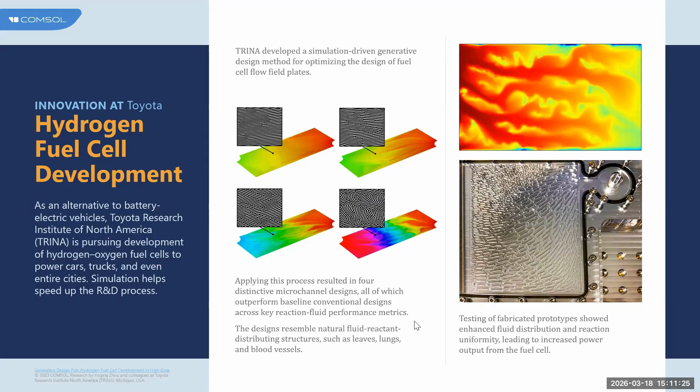And let's start with the hydrogen production itself. Let's go into various technologies, especially used in hydrogen production.

Generally, methane reformers work on a principle where you have steam coming in along with methane, and there you might be requiring to solve CFD analysis, and along with that, you might be looking into chemical kinetics, reaction mechanisms, and so on. Coupling between those are required here.

And when we move on to alkaline electrolyzers, you will be looking into current distributions across your fuel cell or electrolyzer stack. And later on, you might be looking into something like multiphase flow, especially when it comes to the flow channels in PEM electrolyzers, and also in solid oxide electrolyzers.

There will be transport of various ions into the solid domain that you might be looking into, and all of these involve multiphysics nature, or multiphysics couplings are required to solve these. And having a complete look into these multiphysics simulation results would give you more efficient or more cost-effective designs.

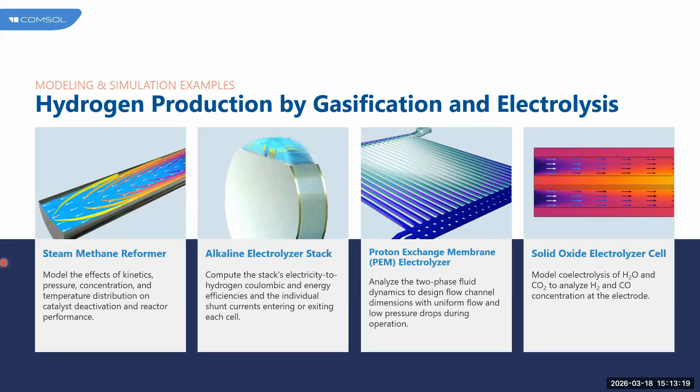Similar to this, when you go to the consumption part as well, there is multiphysics requirement, or multiphysics plays a key role. After producing hydrogen, the next step is the consumption of hydrogen, especially with fuel cells. These fuel cells generate electricity through electrochemical reactions, generally between hydrogen and oxygen. Unlike traditional combustion engines, fuel cells produce more environment-friendly electricity, where the byproduct is only water. To understand how effective that is, we look into CFD simulations plus electrochemistry plus chemical reaction engineering, quite similar to what we had in hydrogen production as well.

Talking more about these fuel cells, you have well-known technologies such as PEM fuel cells, which are widely used in transportation, either in electrical vehicles, buses, and also in some cases as backup power systems. These PEM fuel cells mainly operate at low temperatures and generally start quickly. But the challenges that you face should also be looked into, for example water management or membrane degradation that occurs in these fuel cells. These concepts should be addressed while developing fuel cells or hydrogen production technologies.

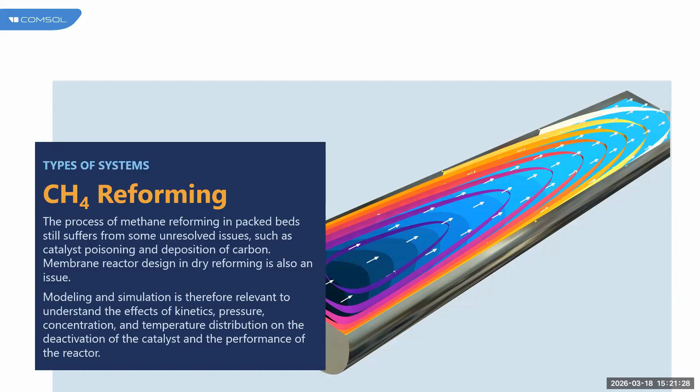To understand the setup, starting with the model definition, in order to simulate methane reforming, we first define the reactions and the reactor configuration. Coming to the reactions, we have both the steam methane reforming reaction along with the water gas shift reaction.

These reactions occur inside a multi-tube plug flow reactor. The geometry you can see on the right hand side of your screen is one such example, wherein you have multi-tube reactors, and in each of these, reactions occur, and these tubes are packed with porous catalytic material that generally speeds up the reaction process.

Because the reforming reaction is highly endothermic in nature, meaning it absorbs heat, we generally place furnaces, and in this example you can see a cylindrical domain being represented.

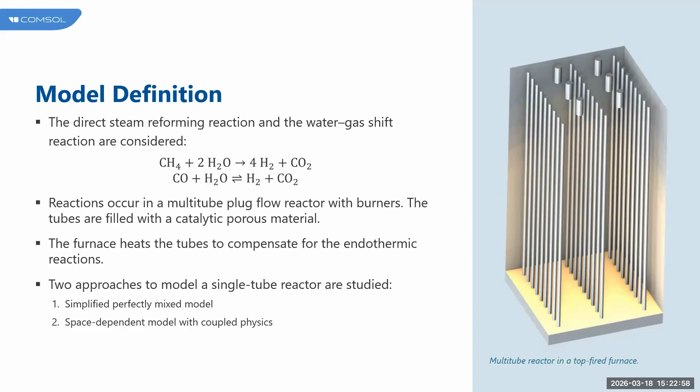This represents the heat source or the furnace that provides the required thermal energy. To analyze the reactor behavior, we have taken two modeling approaches: one is a simplified, perfectly mixed model, and the other is a space-dependent model where we consider the geometric effects as well. Starting with the perfectly mixed model.

This assumes that the reactants are uniformly mixed within the reactor, and again, this is a space-independent model, mainly used for preliminary design analysis.

From the plots, you can see that at the beginning or at the inlet of the reactor tube, the steam methane reforming reactions are quite active, and that produces hydrogen rapidly. Because of the endothermic process, it absorbs heat as well, and we generally try to place these heat sources in such a way that we get uniform distribution of hydrogen production across the reactor length.

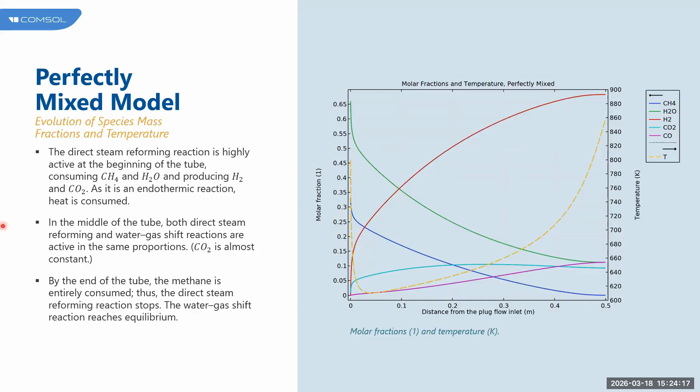But in this case, you can see how the temperatures are dipping near the inlet region, and as we go ahead, the temperature keeps increasing, and later on the methane is completely consumed, and we can look into how much mole fraction of hydrogen has been produced. So this is mainly a space independent model, again for a preliminary kind of understanding.

Then later we can develop a space dependent model with the exact reactor designs. Here the main thing is, earlier we had the assumption of the geometry not being considered. In this particular case, we can look into more realistic reformers.

We can look into the temperature plots as well, how exactly it changes in a three-dimensional manner, and along with that, how in each region hydrogen can be produced, and how exactly the concentration of hydrogen looks.

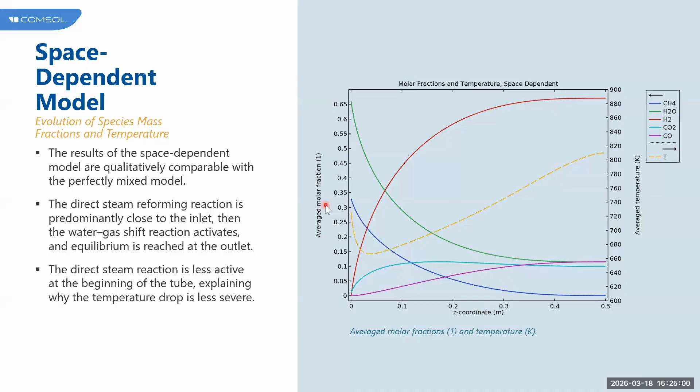Not only these kinds of plots can be generated, you can also look into a complete 3D profile of, let's say, one single reactor tube, and you can look into the concentration of hydrogen or the thermal distribution or even the velocity fields that are affecting these.

Hydrogen production itself - this particular example you can access from the COMSOL website as well. You can go to comsol.com and get access to this. So you can go through the model in detail, and if you have any questions, you can always post them to us.

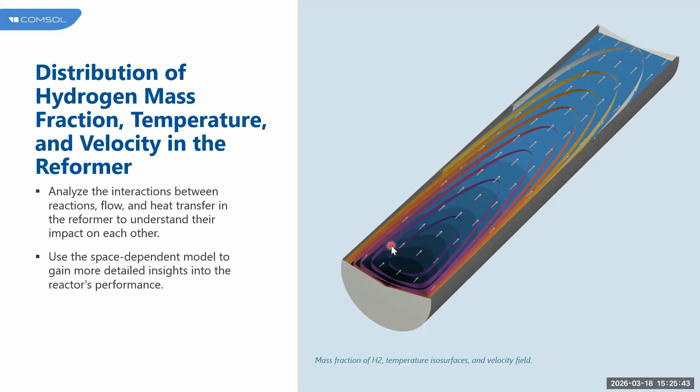Moving ahead from this, we have another example that I have taken from the alkaline electrolyzer stack. Again, from steam methane reformer, we'll move into much more cleaner or greener hydrogen production capabilities.

Suppose there's a large solar farm generating electricity, which will be high during daytime, and sometimes the electricity produced is more than what the grid needs. So instead of wasting this produced energy, we can turn to alkaline electrolyzer devices or technologies, wherein we supply water, and the extra electricity from the solar farm is used to split the water into hydrogen and oxygen. The hydrogen can then be stored and later used for, let's say, fuel cells for electrical vehicle applications, or for any industrial usage as well.

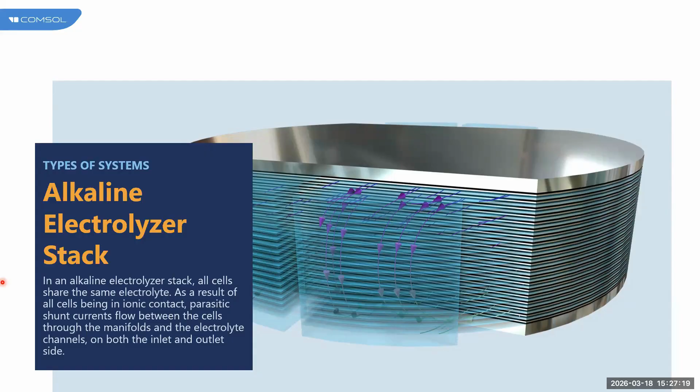Inside these electrolyzer systems, one of the bottlenecks we tend to face is wastage of electricity within the electrolyzer itself. We have various manifolds and regions apart from the electrode assemblies which actually generate hydrogen, and the given electricity can pass through those unwanted regions—that is what we call shunt currents, which can reduce the efficiency of the electrolyzer stack. That is what we'll be looking at in this model.

We'll go into the model definition, how exactly this has been built in COMSOL, and how the geometry has been considered. In this image, you can see one single cell repeated 20 times, and each repeating unit cell represents a single electrolysis cell where water splitting occurs. These cells are stacked together so electrical current flows through all the cells while hydrogen and oxygen are generated, operated at 85 degrees Celsius.

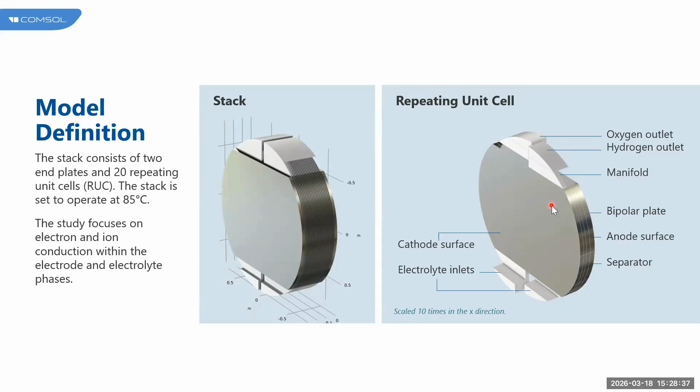The main focus in this model is the electrical current that is not flowing through the membrane electrode assembly. Instead, some of the electricity goes through the manifolds or channels, and we'll see how exactly those can be captured. For this, you have a dedicated interface in COMSOL called the PEM Electrolyzer, wherein you can combine it with CFD analysis, multiphysics flow analysis, to look into the manifold geometries and so on.

First, we look into the current distribution itself. This showcases where exactly the electrolysis reactions are intense—wherever you have high potentials, that is where you can say you have more intense electrolysis reactions occurring. Now, coming to the shunt reactions itself.

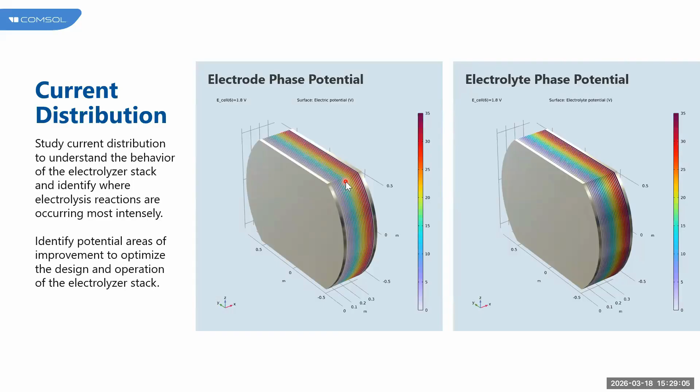In an ideal situation, the stack current should flow from the power supply through each of these cells that drive the electrochemical reactions. However, because the electrolyte is conductive, it provides an alternative pathway for the current, as you can see on screen, wherein instead of going through these cells, it goes through the manifold and bypasses the electrodes. So the efficiency of the system might not be as expected.

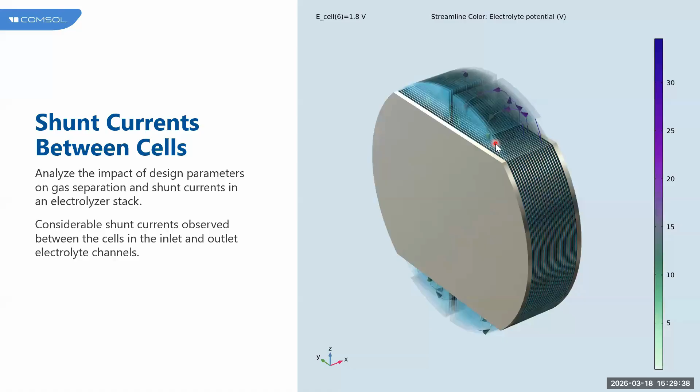Talking about efficiency in this example, we have plotted the Coulombic efficiency, and you can see how exactly that is computed. Along with that, we also look into various energy efficiencies—for this particular plot, we measured the Gibbs free energy for the production of hydrogen. It's highly efficient especially at a stack current of 1400, below which it's not quite efficient.

Even if you increase the stack current, we see a trend where the efficiency keeps on dropping, due to the polarization effects that start to dominate at later stages. To get more efficient results, we'll be looking at the shunt currents, and very similar to these graphs, we try to reduce them both near the inlet and outlet regions.

This graph represents how the shunt currents vary across various cells, where cell 1 is near the inlet and cell 20 is near the outlet. We can see the lower chambers tend to have more shunt currents at the end of the stack, and that is what we'll try to reduce to get much more efficient systems.

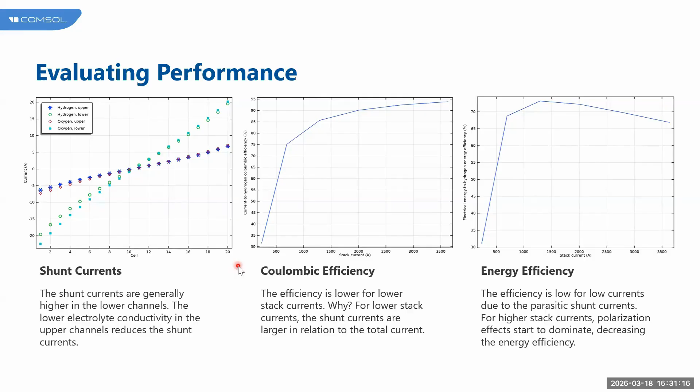Now we'll go into the solid oxide electrolyzer. Unlike alkaline or PEM electrolyzers, solid oxide electrolyzer cells operate at very high temperatures, typically around 800 degrees Celsius. At these elevated temperatures, the electrolyte is a ceramic material that conducts oxygen ions instead of protons or hydroxide ions.

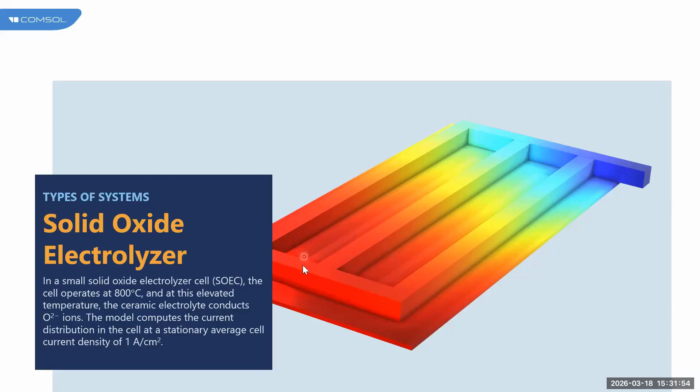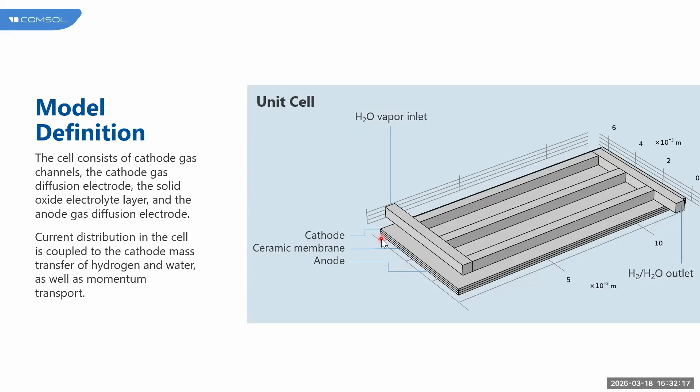We'll be looking into how evenly the water we supply, or the electrolyte potential, is being distributed. So we'll set up a geometry with flow channels. In the previous case, we weren't looking into the CFD aspect, rather how the current passes into the manifold. But in this case, we've added one more layer wherein you can look into the fluid flow mechanisms as well, with an H2O vapor inlet that goes through the electrode channels.

And what we'll be looking at is somewhat a uniform distribution of the velocity profiles in each channel that leads to uniform distribution or uniform generation of hydrogen.

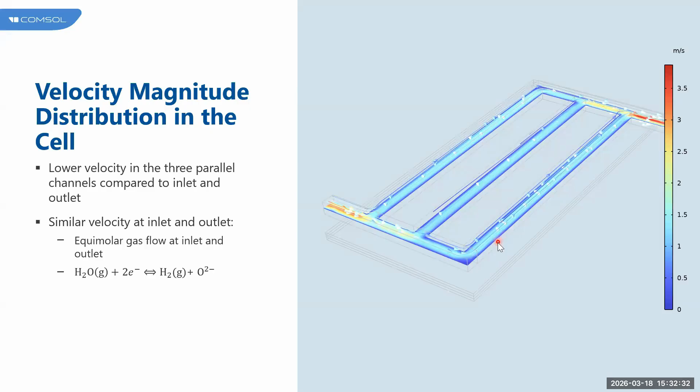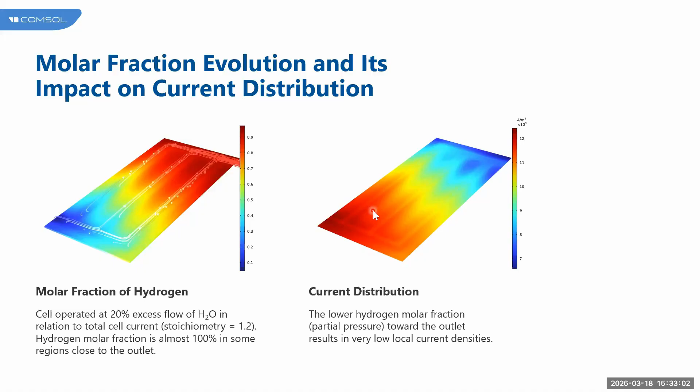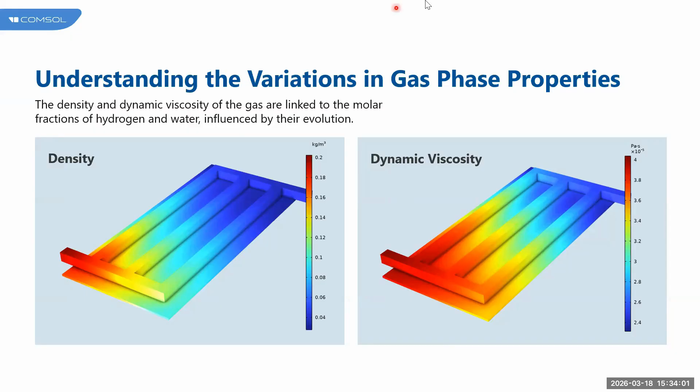Now we'll go into the fuel cell concepts itself, how exactly we can model fuel cells, starting with a non-isothermal PEM fuel cell. In the first example we just had current distribution, then we added flow physics. Now we'll add in many more physics such as heat transfer as well, making the flow non-isothermal.

These fuel cells can be used in various automotive applications. Suppose you are driving a hydrogen fuel cell car, and whenever you start the car, the hydrogen from the tank flows into the fuel cell, and oxygen from the air enters from the other side. Inside the fuel cell these two react and generate electricity, which powers the electric motor. And whenever you try to accelerate your vehicle, more hydrogen would be pushed in.

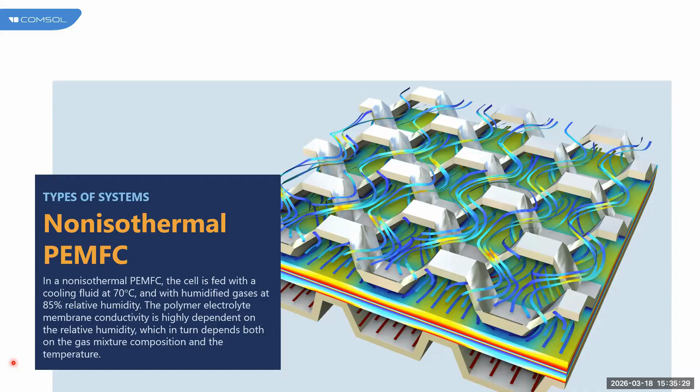We need to analyze the system, how the water starts building up, how the density or humidity at any particular section is increasing, and how that can affect our systems. Having a more humid membrane can lead to lesser transport of ions. At the same time, if I have a dried out membrane, that does not help conductivity at all. So we must look into the balance between these two, and that is what this particular model showcases.

So we have flow channels wherein we give H2 near the inlet sides, and we have bipolar plates, made of stainless steel, on both ends. Along with that, we have cathode gas diffusion layers, a three-layer membrane electrode assembly, anode gas diffusion layers, and cooling channels around each of these layers.

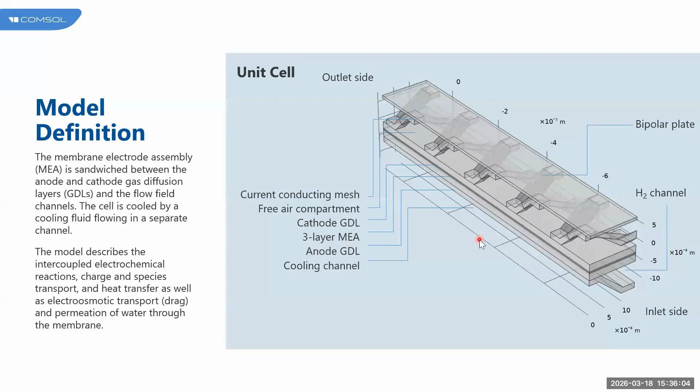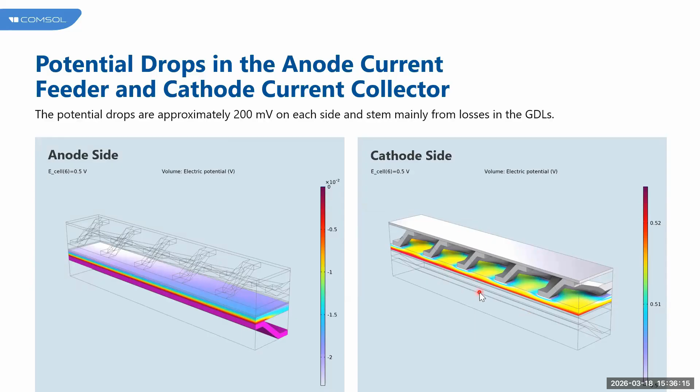So again, looking into the results, starting with the potential drops, we can look at how exactly near each inlet section the potential drop is. And more towards analyzing humidity itself, we'll be looking into the temperature plots.

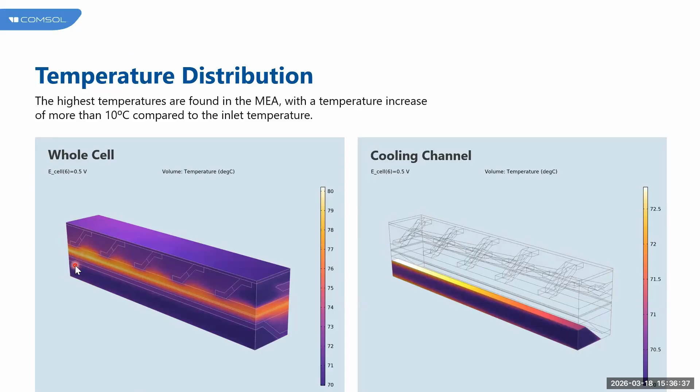But very high humidity, as I mentioned, can affect the transport of ions, whereas near the inlet itself the membrane can get dried out. To have a much more efficient system, this humidity should be more or less uniform across the entire membrane, and it should be within an acceptable amount. These kinds of analyses help us understand fuel cells in general, not only PEMFCs.

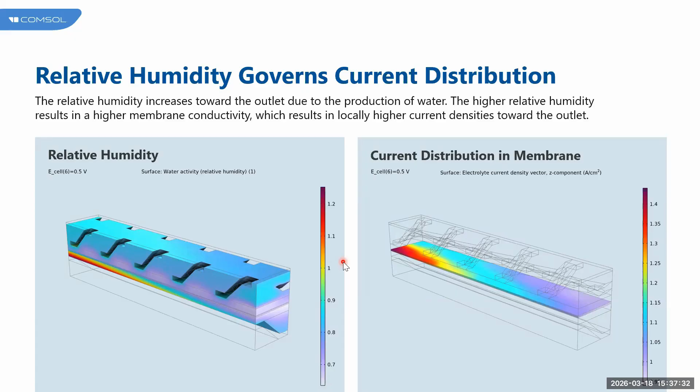So now, probably what we'll do is go into the COMSOL software itself, and look into a demo of a fuel cell stack.

We'll look into the COMSOL graphical user interface and how we work with it, how all of these are defined. COMSOL has a unified graphical user interface, wherein irrespective of what physics domain you are solving for, you would be working with this particular interface itself, and you keep on adding physics from different interfaces.

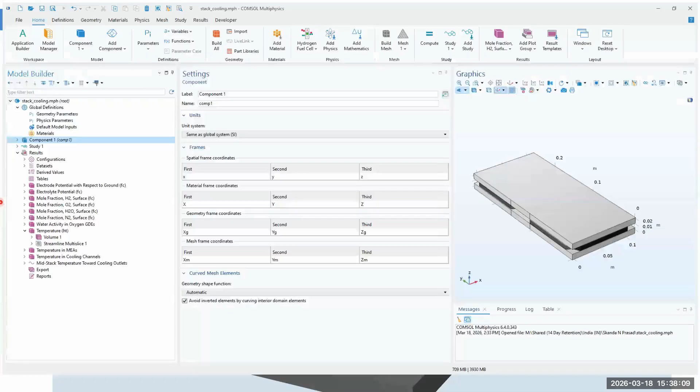So we'll jump into the software itself and look into how exactly this can be modeled. I hope everyone can see the COMSOL window on your screens. This particular graphical user interface is what you will be working with when you open COMSOL, and here all the finite element method steps, starting from geometry creation till the last step to visualize your results, would be in this particular interface itself.

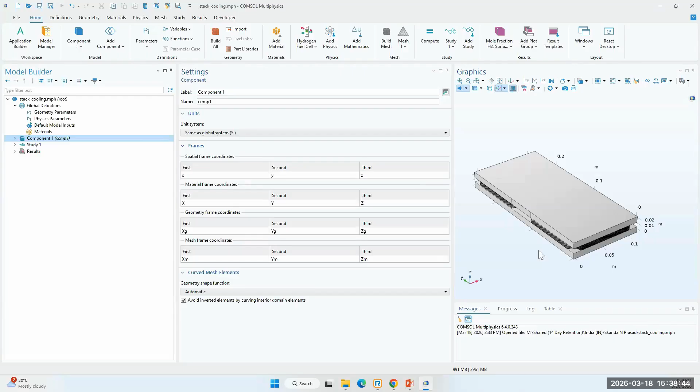On the right hand side, you can see a stack of fuel cell. There are quite a few layers of membrane electrode assemblies, wherein we have separators, flow channels, cooling channel inlets, and bipolar plates, everything assembled together. Looking into the interior part as well, we have various flow channels for the cooling inlet that are affecting this system.

Starting with the geometry itself, in COMSOL you can either work with creating the geometry in the COMSOL kernel itself, or you can import geometries from well-known software in either standard formats or their native formats. In this particular example, we have built the entire channel, or the entire fuel cell stack, in this COMSOL kernel itself. You can later go through these steps to see how exactly to build the geometry, and what primitive or advanced features we have to build it.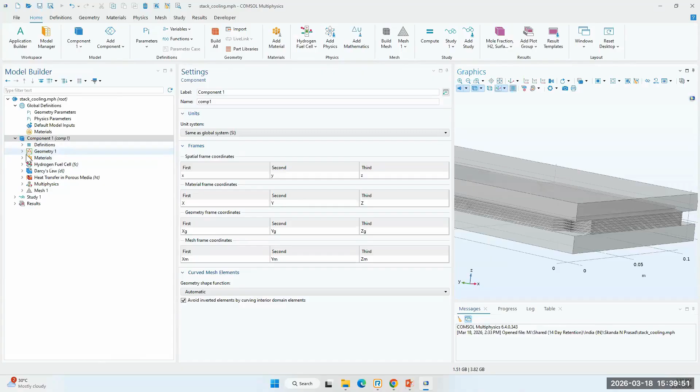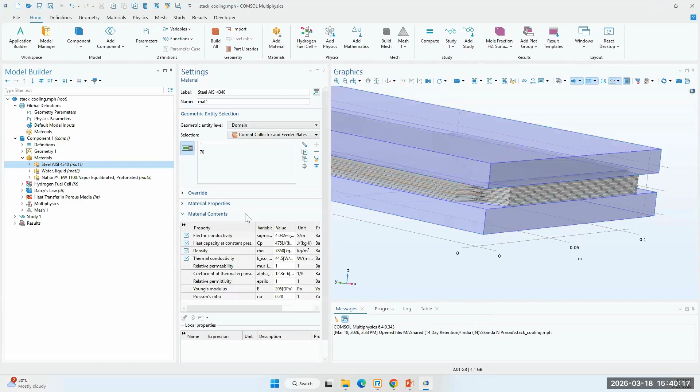Once the geometry is built, we try to assign different materials. Each of these domains or geometrical entities may require various different materials. We can add that from the COMSOL material library - for example, steel AISI 4340. This has been added from the material library, and these two bipolar plates have been given this particular material. Then we have flow channels, where we have assigned water material.

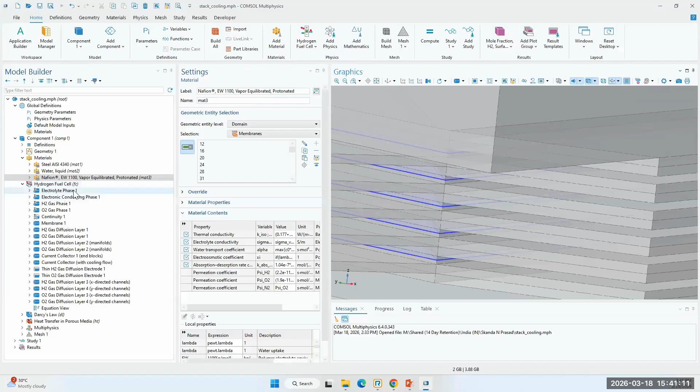Moving on to setting up the physics itself, COMSOL comes with a dedicated interface called hydrogen fuel cell. A very similar interface is also present for alkaline electrolyzer or electrolyzers - not only alkaline, but also for solid oxide, all of these have similar interfaces. In these interfaces, you try to assign each of these domains their respective domain conditions or boundary conditions.

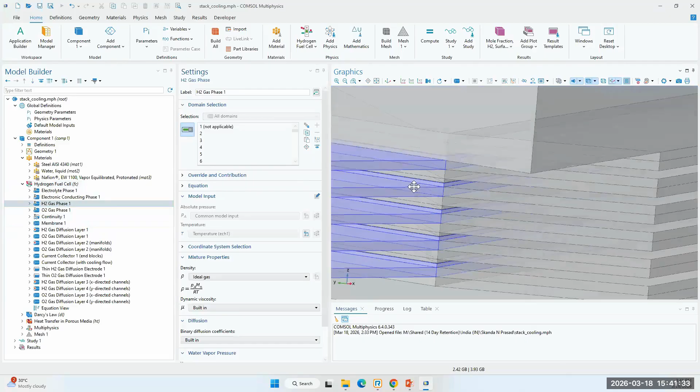With this particular interface, the hydrogen fuel cell interface, we add various membrane electrode conditions along with current collectors and so on. You can see how we have assigned diffusion layers for each individual cell that are stacked in this particular fuel cell.

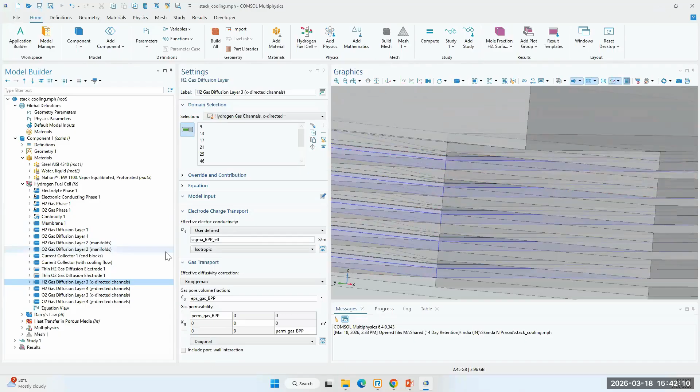Along with hydrogen fuel cell, we are also solving for porous media flow. Darcy's law has been solved here, wherein we have given an inlet velocity, and then we have taken the outlet at the other end. This can be for both H2 and O2 inlets. Along with that, let's say if there are any cooling channels and if that is a free medium instead of a porous medium, even that can be considered.

On top of hydrogen fuel cell, basically for electrochemical applications - we'll go into much more detail later on - but along with that, we have also added heat transfer in porous media.

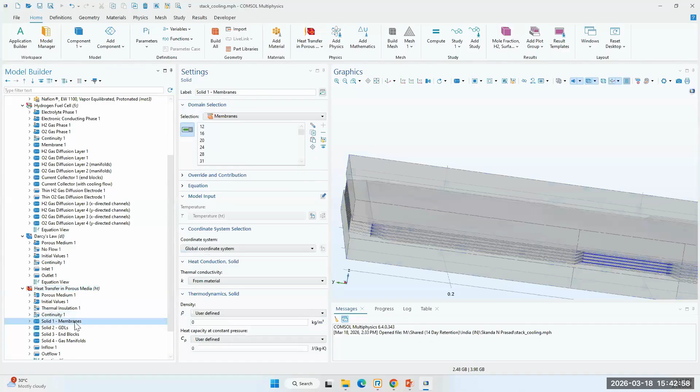Again, specifying which are my solid domains, which are my fluid domains, and what are the inflow conditions. Let's say my gases are coming in at a certain temperature, I would be giving those input values as well. And along with that,

there are multiphysics couplings that connect these interfaces. For example, under the multiphysics node, I can see there's an electrochemical heating that couples the hydrogen fuel cell along with heat transfer in porous media. So whatever temperature effects have to be included from the heat transfer physics would be directly coupled, and whatever effects the electrochemistry gives into the heat transfer is automatically taken. So what I mean is there's no need for you to take the result from one physics domain and put it into the other. Rather, these particular couplings take care of that.

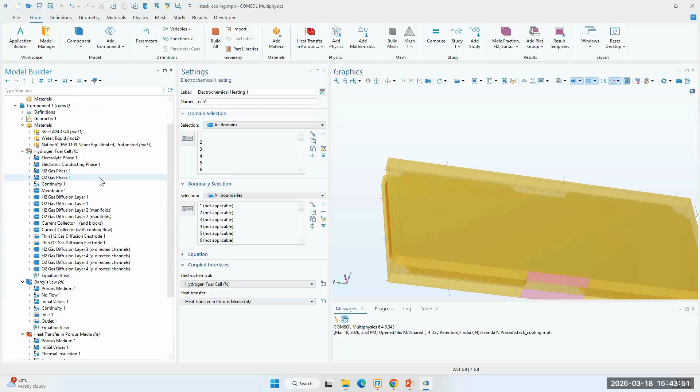Going into detail of the electrochemistry itself, starting with the electrolyte definition, what we'll be defining is the electrolyte regions. One of the key parameters required for this simulation is electrolyte conductivity. Once we define the electrolyte phase, later we'll define the H2 gas phase, O2 gas phase. Again, what we require here is mainly the vapor pressures, and what we'll be using is the diffusion coefficients, how exactly my oxygen or hydrogen gets diffused in different layers.

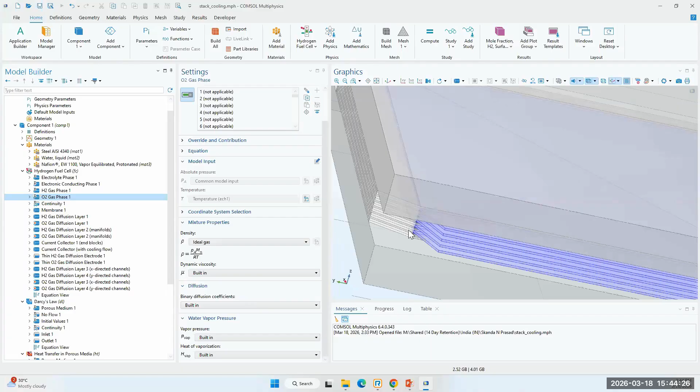Later on, we'll look into the membrane, how effective these membranes can be by giving in transport coefficients and electroosmotic coefficients as well. Then we'll define the diffusion layers, especially for gas transport. Again, I'll define my effective electric conductivity, pore volume fractions, and permeability for these porous domains and model it. In a similar manner, I'll look into the O2 gas diffusion layer as well. Apart from these diffusion layers, this would be repeated for all of these stacks.

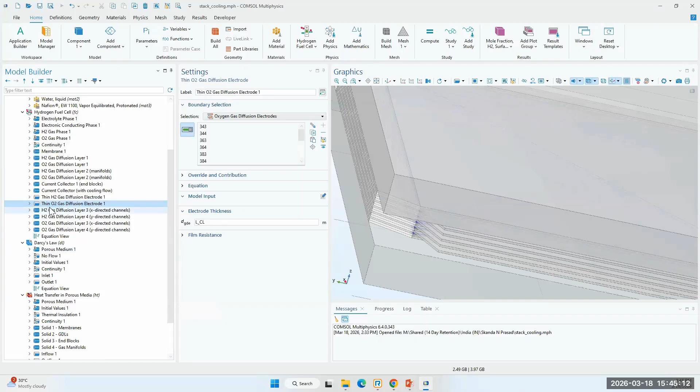Later on, the main area of interest is the electrodes, where I'll be solving for the electrochemical kinetics, mainly Butler-Volmer kinetics or Tafel kinetics. The inputs I need to give here are electrode potentials, or exchange current densities that I would try to solve for. Once this is set up, you'll select all the electrodes present here that are involved in this particular electrochemical process.

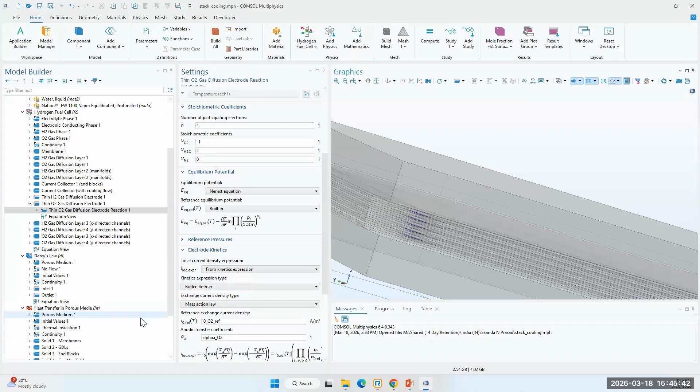And then later, you go into defining the fluid flow mechanisms itself. In this particular example, a porous media flow has been considered, wherein you take Darcy's law with the porous matrix, defining both the fluid and the porous matrix. Again, for the porous matrix, you give the porosity and permeability for the porous regions, along with inlet and outlet conditions.

In a similar fashion, you would describe heat transfer in porous media as well, wherein again you consider the porosity that you've given, along with heat conduction of the porous structure, along with the fluid material going inside the porous structure.

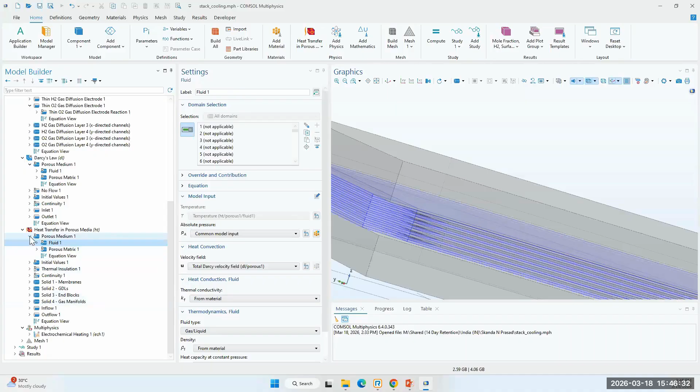So with this setup, you would perform or compute various study types. Coming to COMSOL's study types, we have stationary, time-dependent, frequency domain analysis, based on what exact problem you are working with. Not only this, to initialize your system we have a preset, predefined set of study types. In this case, for initializing your current distribution, you add in those study steps before actually performing any stationary or time-dependent analysis, so that gives you much better initialization.

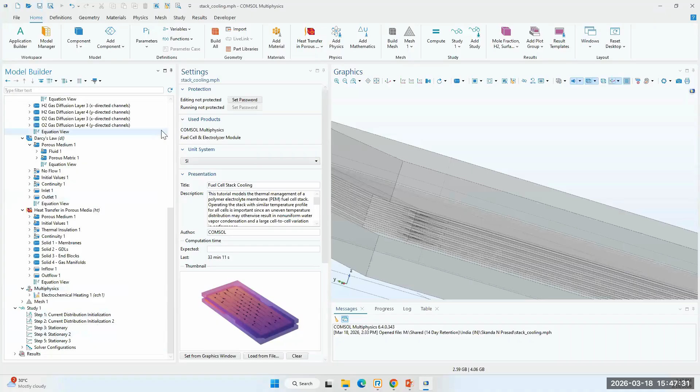Not only for electrochemistry, let's say you're working with turbulent flow, taking the example of steam methane reformers. Going back to that, there can be turbulent flow or turbulent regimes wherein you might want to initialize your wall distance. Again, you will add that particular study type here. And once you add all of these studies, you compute it by clicking on the compute option that you have here.

And later on, once it computes, you look into various results. For example, here, let's say I want to look into the temperature effects in different layers, so I'll plot the temperature variables. Either I can create a 3D plot, or I can probe a point and see how exactly my temperature drops over time. But again, in this case, we have done a stationary analysis.

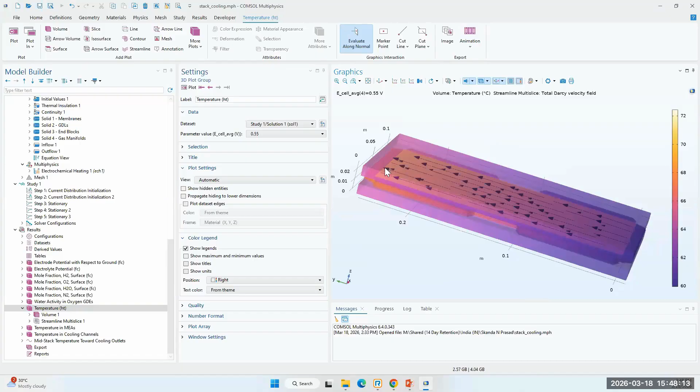But if you do a time-dependent analysis, you can see how temperature drops over time. Or let's say you want to see how temperature is dropping at a particular section. You can draw a line, or create a plane, and exactly visualize how the temperature profiles are being plotted in the region of your interest.

Along with that, probably the main thing you will be looking at is the temperature in the membrane electrode assembly itself, as I was talking about in the non-isothermal fuel cell example. This temperature affects the humidity, and based on this, you would try to create your flow channels in such a way that the temperature you get on all of these membranes is uniform, so that you can operate in conditions where the humidity arising due to this temperature distribution can be controlled. So these kinds of analysis can be performed.

And again, there are various examples, not only for fuel cells, but electrolyzers from a production point of view, steam methane reformers, or if you want to look into multiphase flows, there are various examples of those as well. I'm not going into intricate details of exactly what physics interfaces are there. If you're interested to know more, you can put it in the questions tab, and we can take those questions up and try to address them.

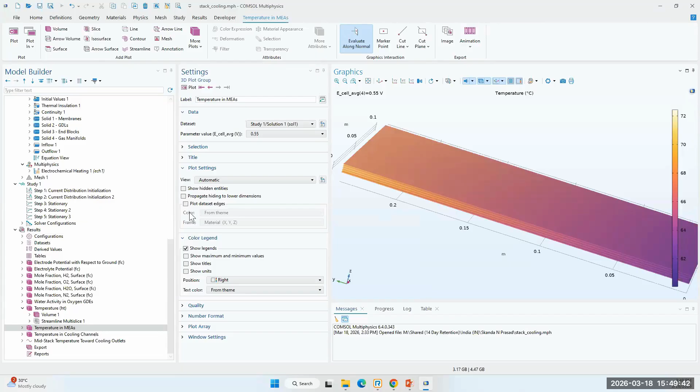I hope this particular model gives you a good brief understanding of how exactly you can work with the COMSOL environment, or how you can set up any particular problem in COMSOL. Irrespective of what problem you have, you would be going into the same interfaces, and you would keep on changing the physics interfaces that you add.

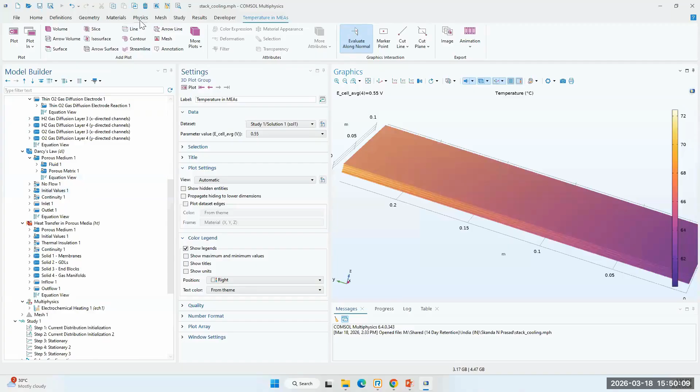For example, let's say I want to solve for a multiphase flow. I would go to physics, add physics, and add the required multiphase phenomena that is occurring. For example, let's say there's a dispersed phase mechanism that I want to add - I'll just click on the Euler model, or whichever relevant model I have, and add it to my model builder. So this is how you would be working with COMSOL.

A quick demo to make you understand how COMSOL works, or how you can define your systems in COMSOL, again focusing on the advantages that you have. You add in or import geometries, or create geometries here, add materials, go to physics setup with various boundary and domain conditions, then move on to the visualization part - all in one particular interface with the multiphysics aspect being captured. So let's go back to the slide deck.

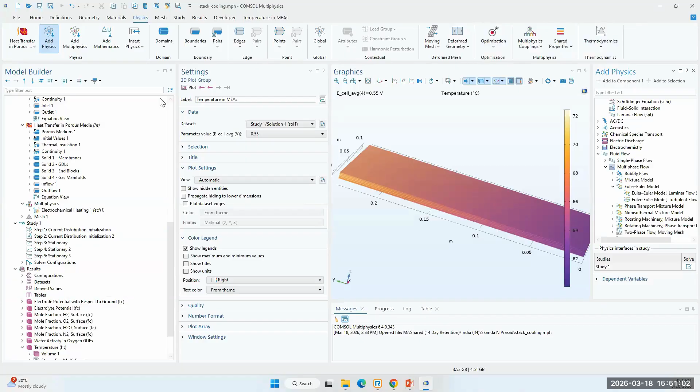Let's see how further you can optimize your performance. Not only can you try to understand and analyze your system, as we saw in the first user story - what we want is to optimize these designs. So COMSOL has dedicated features for performing this optimization. On top of whatever study type you add, stationary or time dependent, you add another optimization study, basically to optimize any particular geometry or parameter and get a much more useful or efficient device.